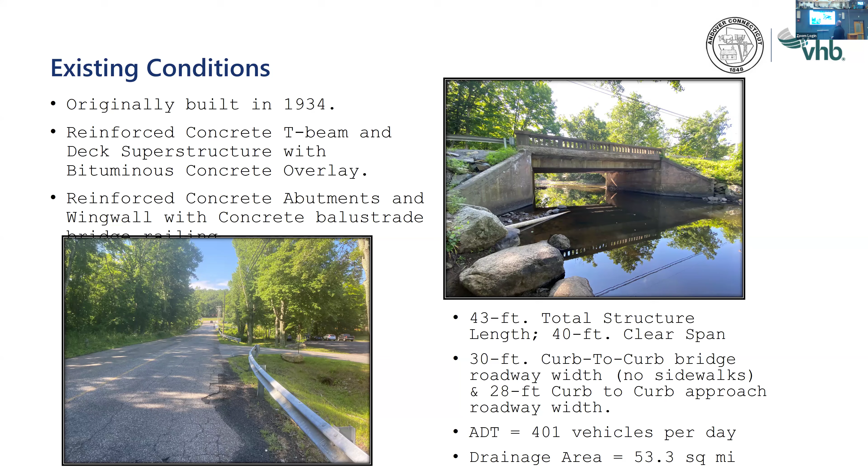All right, so a couple of pictures. So look at the bridge, looking downstream. This is the downstream elevation, so we're looking upstream. You can see it there. It looks different than on the presentation, but it's a little grainy. So here's the upstream elevation, so we're looking downstream, looking east.

And you can see the large riprap that would be put in place to control erosion of the embankments and protect the foundation currently. So there's scour, they're protecting it from scour. What the current riprap is doing, and as you can see, the bridge is a constriction in the channel. What you'll see is that the proposed structure will sit back so that the full natural channel width can flow through.

Pipe or a tree in the picture? It is, I think it's a drainage pipe. Yeah, I think that is a drainage pipe, it could be a tree. It's tough to tell. And maybe a dry hydrant - there's gonna be a dry hydrant installed on the downstream side on the proposed bridge. But I'm not sure, it's not a major drainage item.

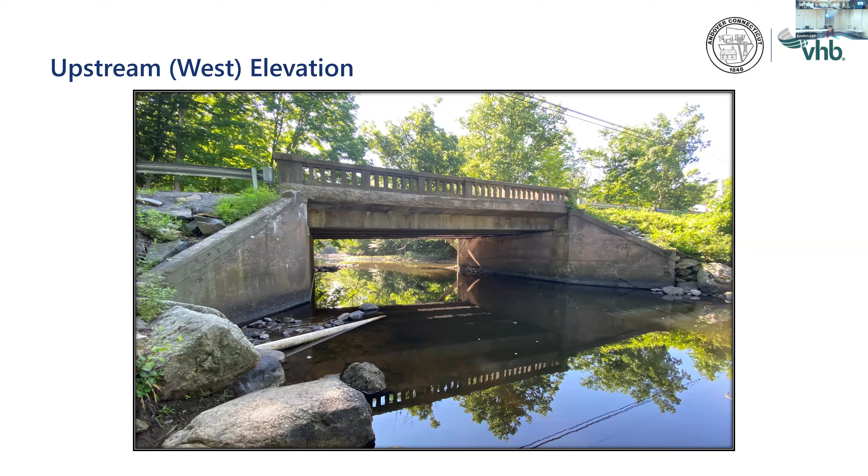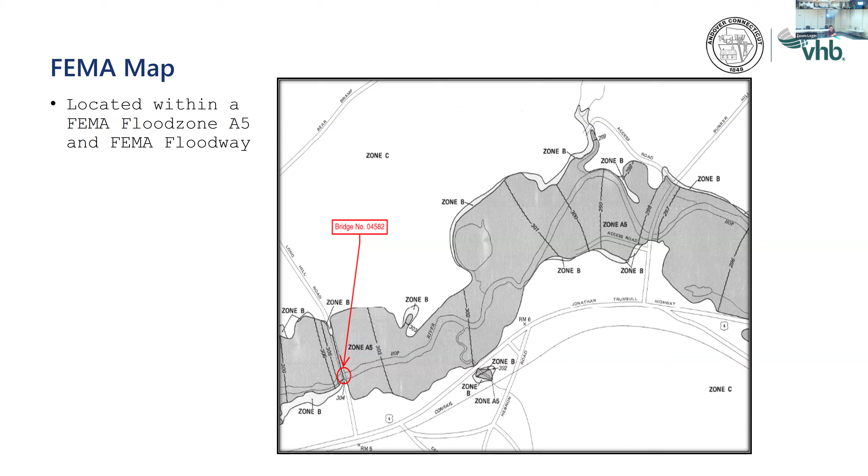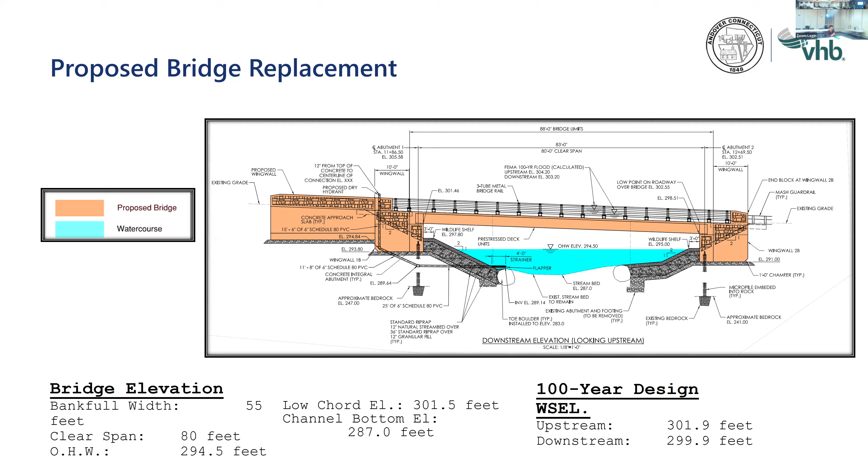And this black line down here is a dry hydrant. It's either new, I don't know if that was a dry hydrant on the other side, but the town asked for a dry hydrant to be installed on this side.

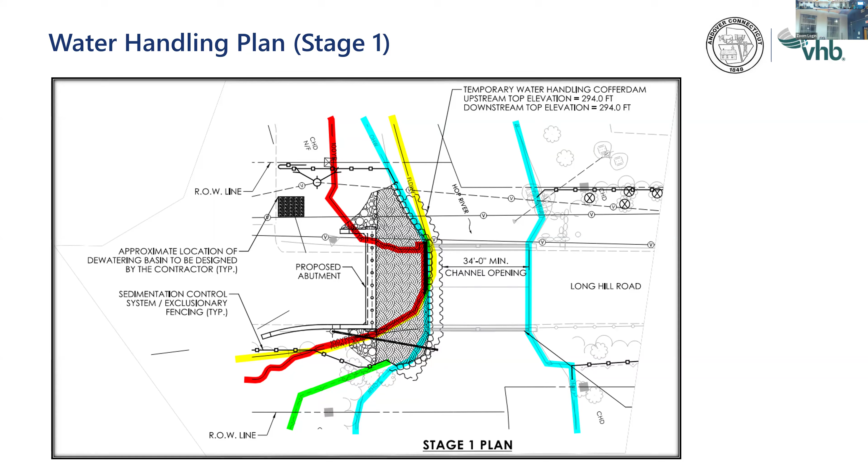So I guess everything that's on the left side has now been completed. So that's what it's showing. So is water going through on that side now?

Yes, so the circles are all, this is the jagged line, the water handling. These are toe boulders that are being installed at the toe of the embankment, so that's not water handling, they'll be not flush with the stream bed, but close to the stream bed level. So the top right of that image you're comparing is the ball fields, essentially that area.

Yes, okay. Yeah, some of the lines look strange, but those are property lines. So as you can see, like the town right of way line that's dashed, and then it's the property for ball fields. The ball field recreational property actually starts in the middle of the stream.

But the blue line is ordinary high water, and that is also where the existing abutment faces are. So the ordinary high water line runs along the existing abutment faces. So you can see these are the new substructures, installed quite a ways back from the existing.

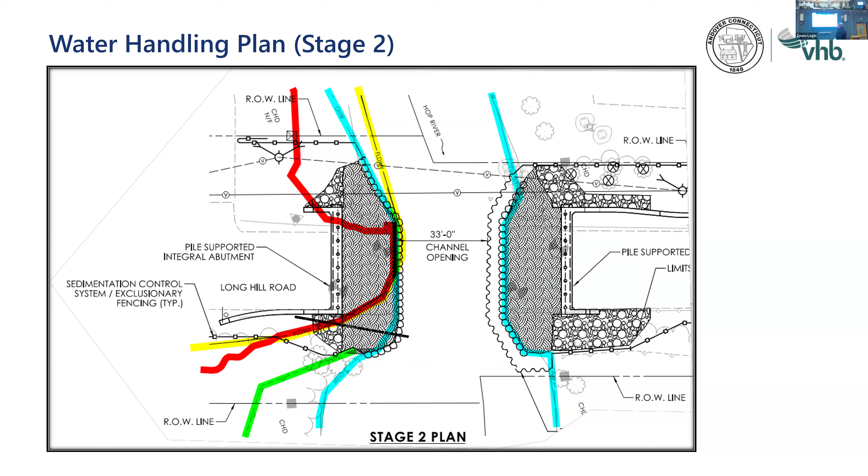And so there's necessary impacts to the wetlands and water course. They're really unavoidable for this type of work, and we do our best to minimize them.

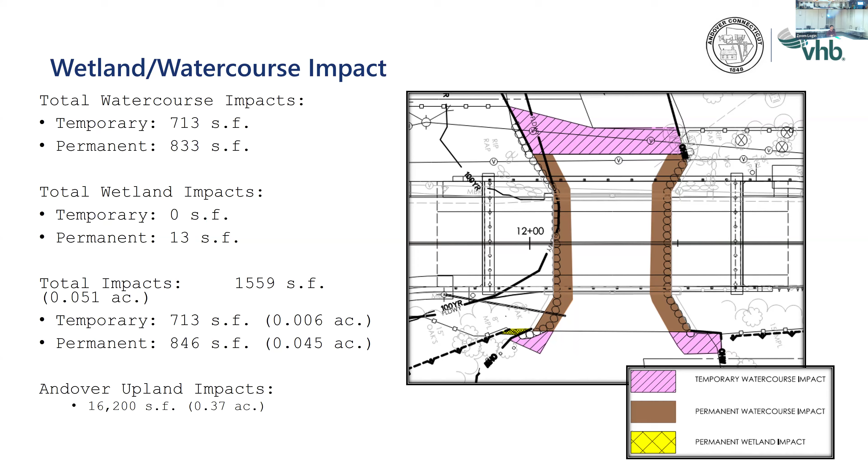So floodplain impacts - there's a net excavation of 750 cubic yards. That's basically all due to widening of the structure. So that fill between where the existing structure is and the proposed structure will all be removed, and that's the difference between the cut and fill.

Does it have to be tested before it's hauled off site? That is a current - it's kind of been updated where all of that is now starting to get tested. Typically it's something they do from soils and historical knowledge of soils on the site, but early on there's work done by DOT's environmental agency. They determine whether or not there's dirty dirt or not, but there's been testing done and it's been determined whether or not it can be reused. As far as I know, this is all reusable.

Is there a plan for where it would be reused? So there's a net excavation, so there will be some that is excavated and then brought back in. The stockpile area is determined by the contractor. If there's not an area on site to do it, they'll typically coordinate with the town. With Public Works having an area right there, I wouldn't be surprised if that's where it goes temporarily, because that's pretty quick for them to get in and out, maybe a part of the ball field parking. They try to be as close as they can.

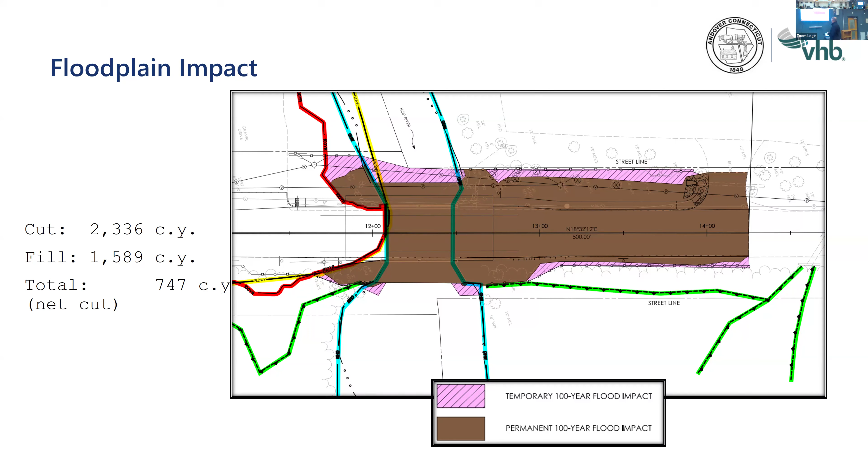So sediment erosion control - because it's administered by the state, the contractor is required to follow the state guidelines for stormwater quality and sediment erosion control. A third-party inspector is hired by the town, so they report to the town, and they will be overseeing the job.

There'll be water handling implemented to complete work behind confinement, there will be sediment erosion control fencing, so there's exclusionary fencing on this project due to some protected species found on site. You can see the hooks if you look real close - in the corners of the sediment erosion control, they kind of hook back around, and that's to exclude the species of concern from getting back into the site.

There'll be a sweep before construction started by a qualified herpetologist to remove species, and that way they can't get back in. There's also a reptile mitigation plan that was included in the packet too, that was part of the DEEP approval.

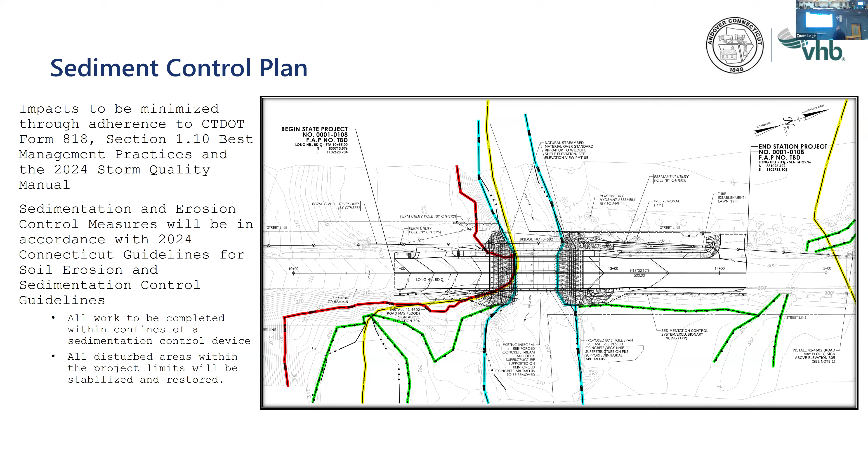Any stream bed excavated, as we talked about, will be stockpiled and reused to maintain the riverine characteristics. And after construction, all disturbed areas will be stabilized and restored with graft turf establishment where appropriate.

So it's a lot of natural resource coordination with DEEP and Army Corps. We have to discuss all potential species that will be impacted. So the fisheries have approved the permit plans.

There will be a time of year restriction for unconfined work, between June 1st and September 30th. The contractor could work in the stream without confinement during that time, because that's outside of the fisheries area time of concern. The contractor is allowed to install the water handling coffer dam outside of that time, typically to allow the work to be completed behind confinement.

So if they start in May, they can install that, and all that work is completed behind confinement. Typically they're not working unconfined, and DEEP will be out on the site because of the species as well. So there'll be a lot of oversight on this project.

The project is in an NDDB area - Natural Diversity Database, which covers state listed species. There were several identified turtles, snakes, and bats that were certified, and received a final determination for the project in September, stating that due to the precautions taken that are in the contract and permit plans, the project is accepted and approved. As we talked about, this reptile protection plan requires qualified herpetologists on site during construction, and all the best management practices required have been incorporated into the plans.

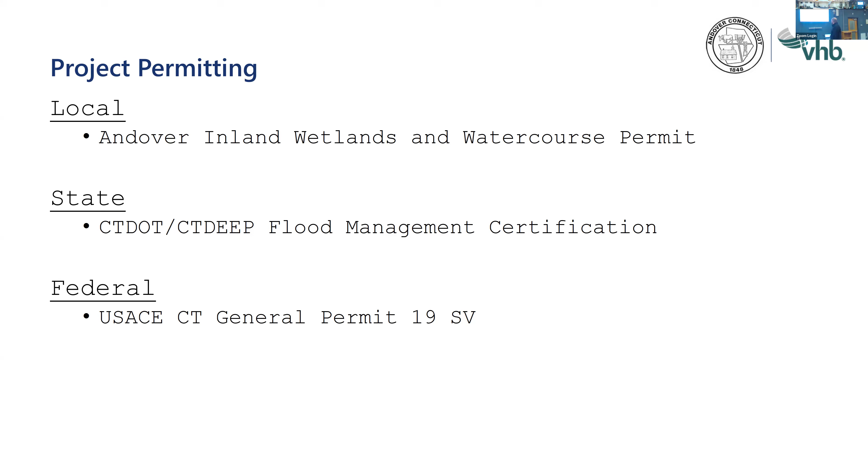The project is slated to begin in the spring and be finished at the end of the year, approximately November. And that's it, so open up to any more questions. Thank you.

So I guess, looking back to what we did here as a commission during the last bridge, we decided it wasn't a significant activity. And that bothered me after that - it had to do with Public Works doing a bunch of stuff on the banks over there before the construction of the bridge started.

Which bridge are you talking about? Sorry, what's that? Are you talking about the Long Hill Bridge or a different bridge? Bunker Hill? Bunker Hill. Okay, yeah.

I watched what was going on, and I said, how could this not be a significant impact? Granted, we got everybody and his brother providing a lot of oversight and approval to this, but that's our job to make sure we got everything down. So I guess that's a concern of mine that we didn't do that last time.

And I'm not hearing anything about what the Public Works thing is that's going to be going on prior to and in support of whoever comes in to actually do the construction of the bridge. The bridge construction went very smoothly - we were all gung ho to get Public Works in, and when I saw what they were doing, I was surprised at the extent of their excavation along the banks, what they were doing there and all that stuff. And there's nobody here tonight to talk about any of that - that was just kind of extra stuff that got thrown in when we were doing the bridge. I don't know, I'm just not the smartest guy in the world on this stuff.

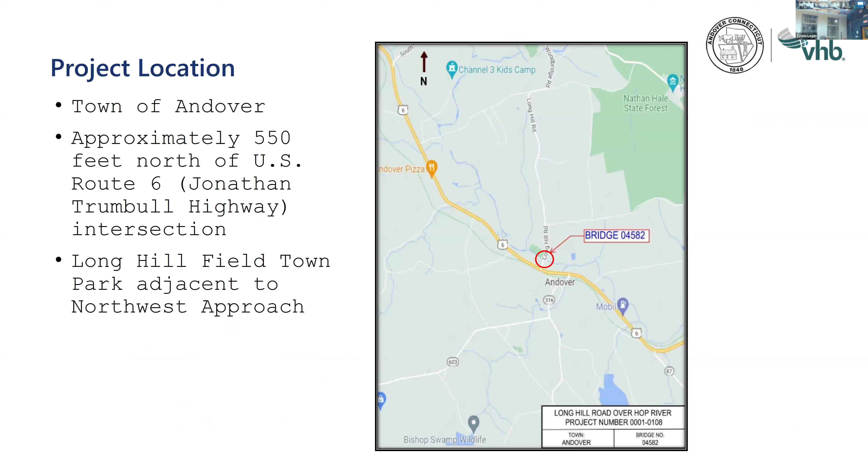I didn't see any of the pictures or drawings that described anything about remediation of the banks, or how far away from the bridge wing walls this work is gonna be happening.

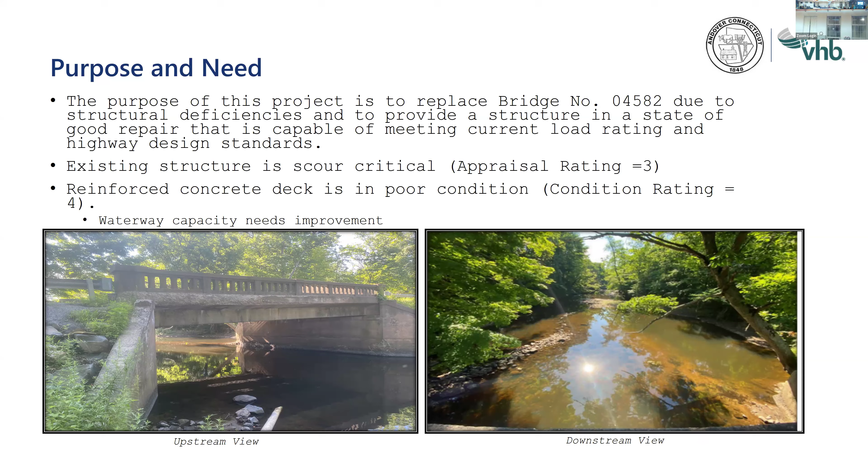I'm not sure if there's remediation of the bank, because you're essentially removing material. I don't know if there's really remediation to be done - my understanding is you're kind of cutting out the sides and then installing new sides essentially. I wouldn't think there's really too much to remediate beyond any impact from the activity of the machinery to conduct that work.

This is a different type of bridge - that one was a little more involved because it had the culvert, like 3 steel culverts, filled with fill, so you had to basically dig all that stuff out of the stream.

Monitoring or - it always happens that way, no matter which of these jobs you go look at, what you see is not what you think you're gonna see when you get the little brief on what's gonna be going on down there.

It's kind of like - one of my favorites is we get a drawing that shows the extent of clearing for a building site, and what happens is they go out and clear everything, and then they put little ribbons around the trees on the outer perimeter to show the extent of clearing that was marked off before they started to clear.

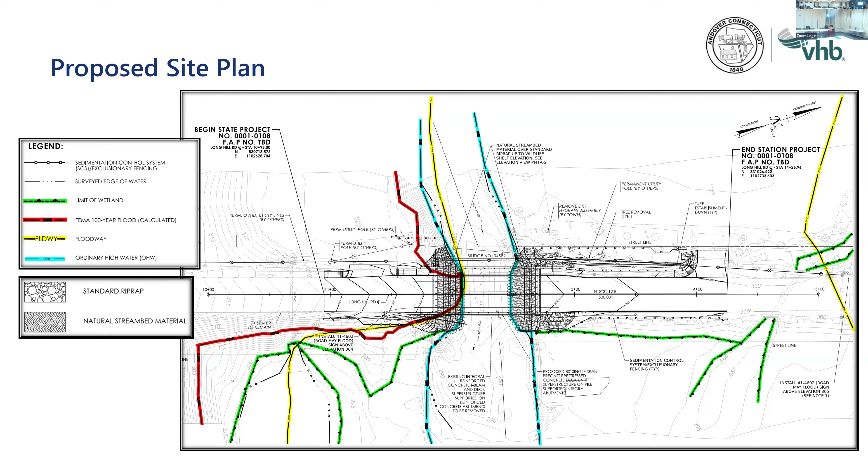I don't think they'll be able to answer any questions. Do you want to request DPW at the next meeting, or do you want to do a site walk with them?

That might be nice. Here's an idea - maybe if Hank's available, because I'm sure he has a pretty good understanding of the site.

Get the new public works guy to just show us what he's gonna do. Well, I guess that's not a site walk, that's something different - more of a pre-construction meeting. We could do it here, or have them show us pictures of whatever we think.

We're being asked to approve this thing and there's a lot of questions. Maybe that's the way it is on big projects. I'm not smart enough to figure out what this plan is telling me. I'll give it another shot, but I thought there was a little disconnect between public works and the plan last time around.

You're probably more concerned because there's only certain people involved. We could set up a meeting, or ask him to show up at the next wetlands meeting before we approve it. I'm okay with that - I could ask him to come and develop some kind of condition, draft a pre-construction meeting condition, and mark the limits of clearing if they're participating.